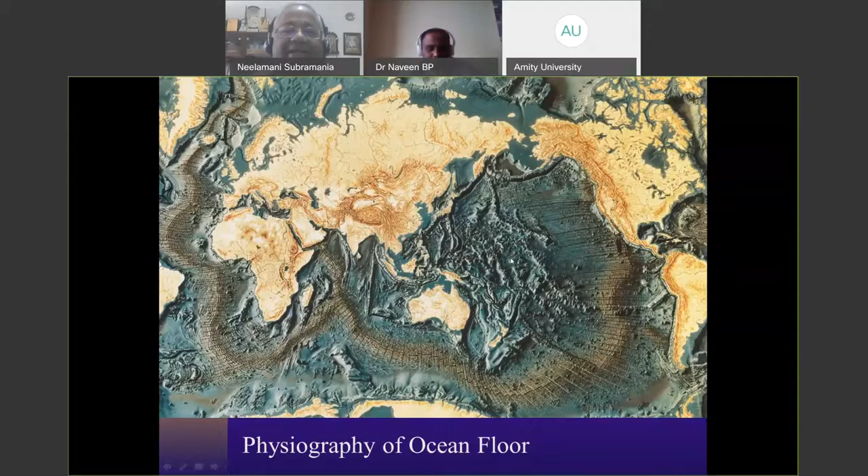Nearly 71% of the surface of the globe is water. Some important facts you have to know why you would love to do higher study in ocean engineering. You have to know some tasty information. Ocean is very rich in protein. I am sure everybody loves to eat fish and prawns. And it is a future source for power. Ocean has a very significant amount of power from wave, tide, current, thermal, biomass, etc. It is a reservoir for organic and inorganic material.

Every source of minerals from the earth will disappear in the future, including oil, gas, coal, iron ore, gold ore, everything will disappear because of our increased consumption. Then we have to go to the sea to exploit these minerals. So it is a reservoir of organic and inorganic material and potable water supply.

For example, Gulf countries, we don't have fresh water. We take seawater, desalinate, and that is 100% in Kuwait, for example. In India also, some cities are taking seawater for desalination. In future, with the increase in population, we need more desalination, and ocean is the main supplier.

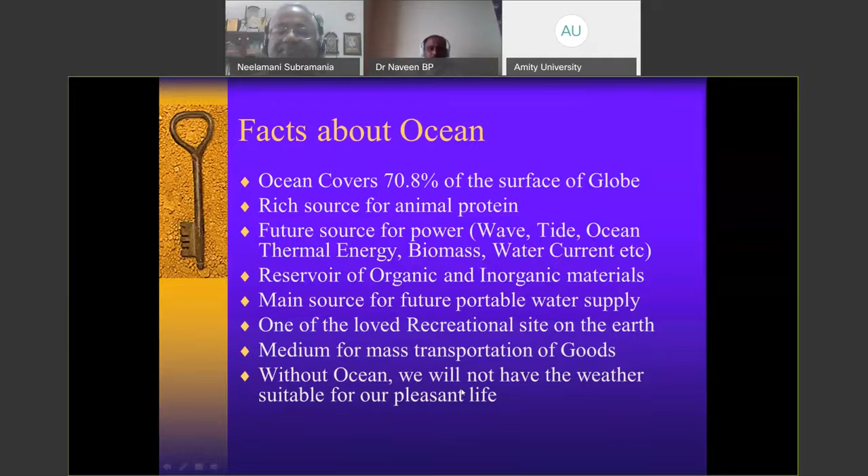And some additional facts: the average ocean depth is 3,800 meters, whereas the average elevation of the land is only 840. Mariana Trench is 11 kilometers deep compared to Everest, 8.8 kilometers high. The volume of ocean water is 1,370 million cubic kilometers. A huge volume of water. More than 97%, 98% of the Earth's water is in the ocean.

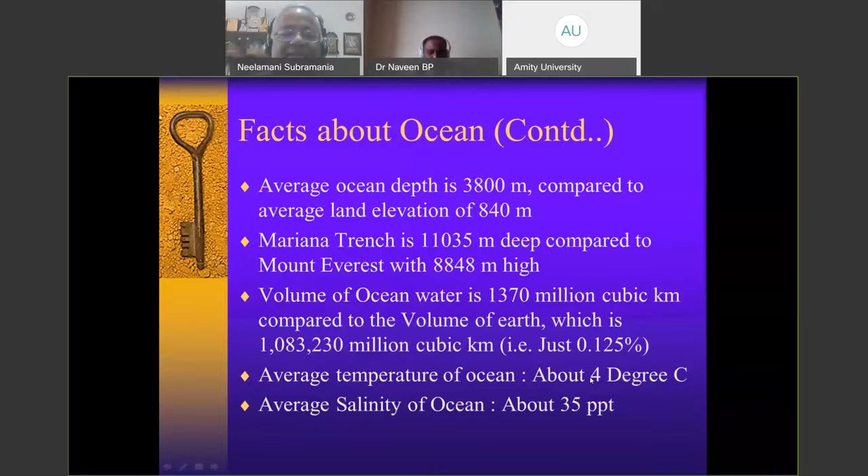The beautiful thing is the average temperature of ocean is only 4 degrees centigrade. This is the reason the Earth is still mild; we are able to live because of the 4 degree average temperature of the sea water. But in the ocean, the salinity of the water is 35, salt content.

Now we will go to the challenges. What type of challenges do we face doing engineering development? Okay, as a civil engineer, you know, for any infrastructure development, you have to know the load on the structure. If you are going to build a dam or a shopping complex or road or a theater or multi-story building, the first thing you have to know is the load, what type of load the structure will be taking. So for the design load, you do the design.

In ocean, the problem is the loads are not simple like the land-based structure. For the land-based structure, you take a dead load, live load, and if the structure is high, then you take wind load. And if it is an earthquake-prone zone, then you take earthquake load. Whereas in the sea, the very dominant load is from the water around the structure. That water acts on the structure in different forms.

See, for example, a tsunami. When a tsunami occurs, the water in the ocean, which is hitting the structure, transfers the load. So in such an area, you have to design the structure for tsunami.

In areas where you have very high cyclones, like Odisha, Andhra Pradesh, Tamil Nadu, every year very high cyclones and cyclone-induced waves, storm surges, hit coastal structures. So we have to know what is the load from such an event. Then you have to design the structure for such type of event. They are very, very dynamic loads.

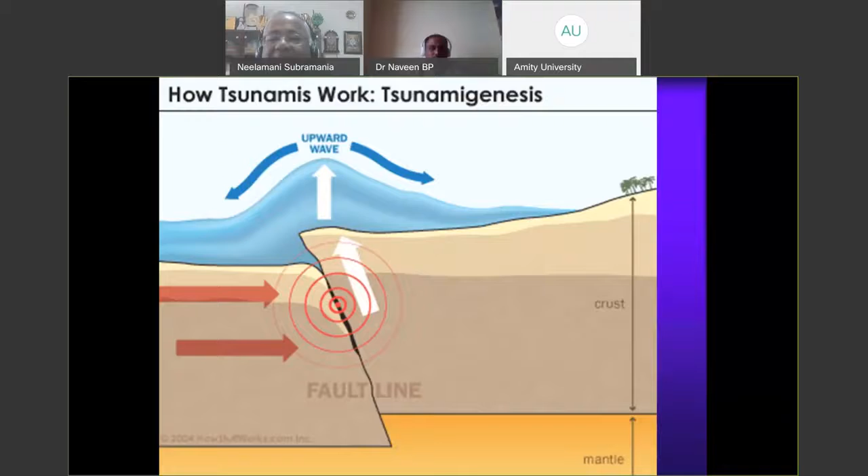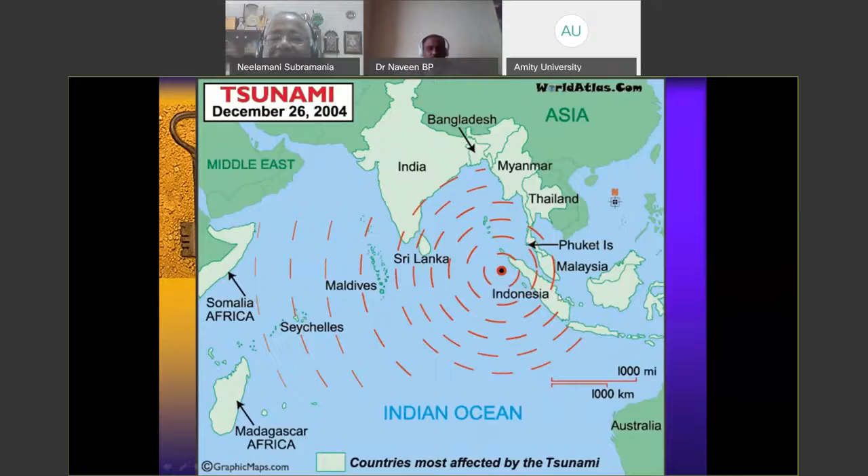Tsunami. You already know what a tsunami is. When an earthquake happens in the sea, it will create a tsunami. The science behind the tsunami I'm not going to explain, because in the 1 hour time we cannot spend much on this. The 2004 tsunami from Indonesia killed many thousands of people in India, Sri Lanka, all around these places. Sometimes with a tsunami, you will get waves as high as a 7-story building. Imagine when such a wave acts on coastal infrastructure; it has to withstand it.

In 2004, in India as well as Sri Lanka, people never thought a tsunami would hit, so none of the structures were built for tsunami. But after the tsunami, people are now building many structures to take care of tsunami, like Japan. In most of the coastal area, they build structures not to fail for tsunami, but still failure will occur when the loads exceed the design load.

Cyclone, very critical for India. In India, all the way from the southern part of Tamil Nadu to West Bengal, every location is prone to cyclone activity.

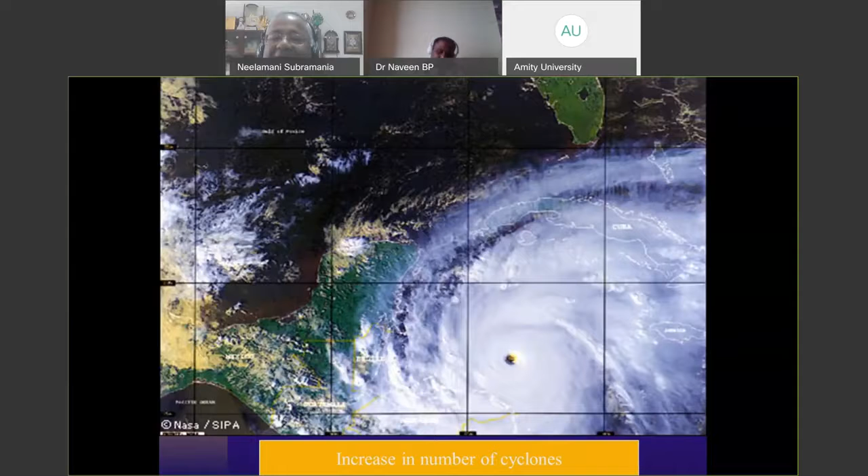During a cyclone, the wind speed sometimes exceeds 200 kilometers per hour. So you have to design the structure for such wind speeds in the Bay of Bengal and all the coastal areas in the Bay of Bengal. Because in India,

see, when we talk about wind, the world divides it into 5 categories. The 5th category is the worst category. In India, every year we face category 4 and category 5 on the east coast. That is why we have to design all the structures for category 4 or 5. Otherwise, it will lead to catastrophic failure. People learn to design structures for such high cyclones, wind speeds more than 155 miles per hour.

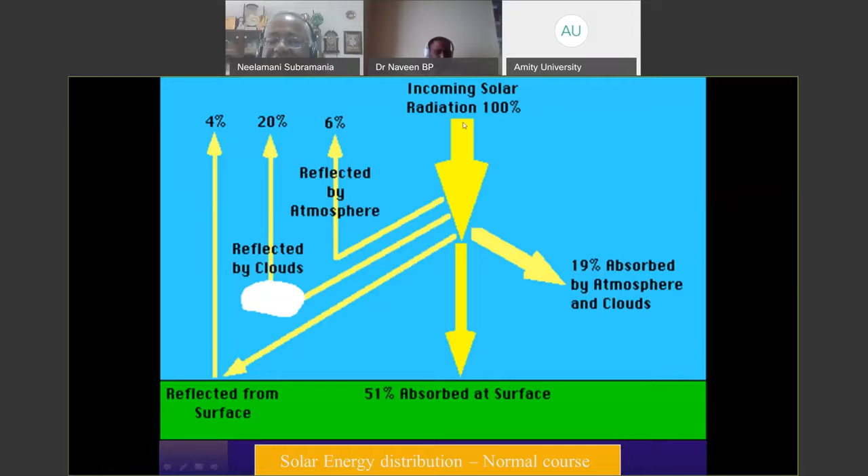Global warming, I will just spend a minute on this. You know what global warming is? When the sun's radiation falls on the earth, it should reflect back. If it is not reflecting back because of greenhouse gases, then the earth will become warmer and warmer every year. That is the meaning of the greenhouse gas effect.

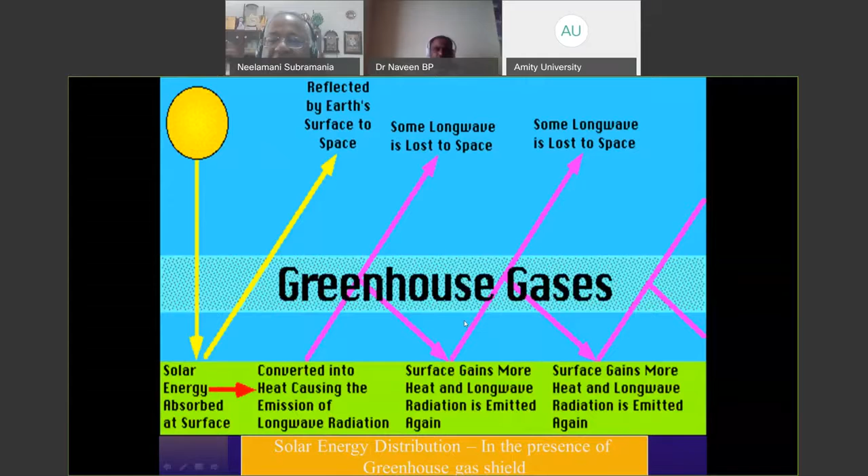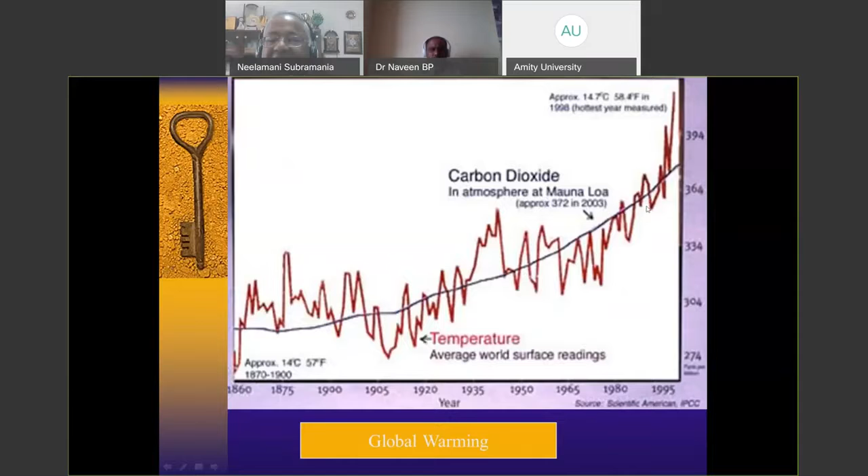You see here from 1860, this black line indicates the carbon dioxide level in the atmosphere. This red line indicates how the temperature is rising. Temperature has been rising for the last 100 years, no doubt. The carbon dioxide level is also increasing. So both these things are causing sea level rise and associated problems.

This picture shows how the temperature of the globe has been increasing from 1990. We are here now, 1.5–2 degrees of temperature increase from 1990. By 2100, the highest temperature increase expected is 5 degrees. A 5 degree C temperature increase means all the ice around the world will melt.

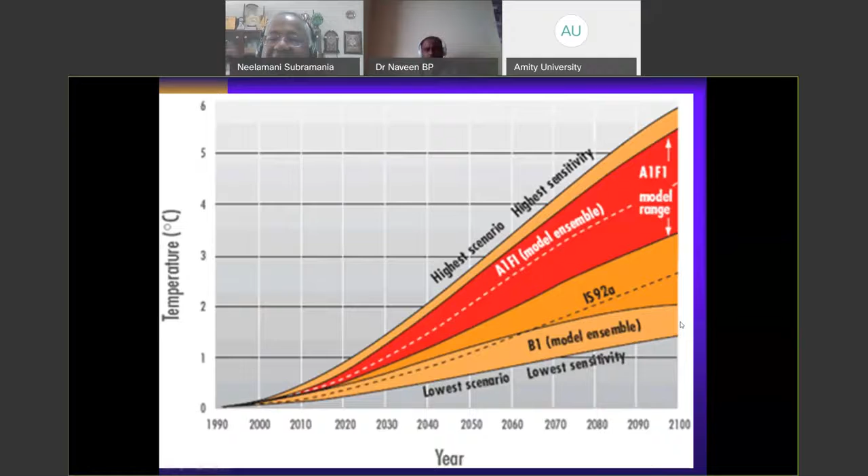So like Corona, we are fighting Corona, we will fight the problem of sea level rise. Global warming is much more severe than the Corona problem. Many of us are not feeling it, but when the carbon dioxide level in the atmosphere crosses 500 ppm, it is a much more severe catastrophe than Corona. We cannot stop sea level rise. Sea level rise will increase like this. It will flood all the cities around the world.

Trillions, many trillions of dollars will be lost in such a time. So we have to be very careful in our lifestyle to make sure sea levels are not rising to such an extent.

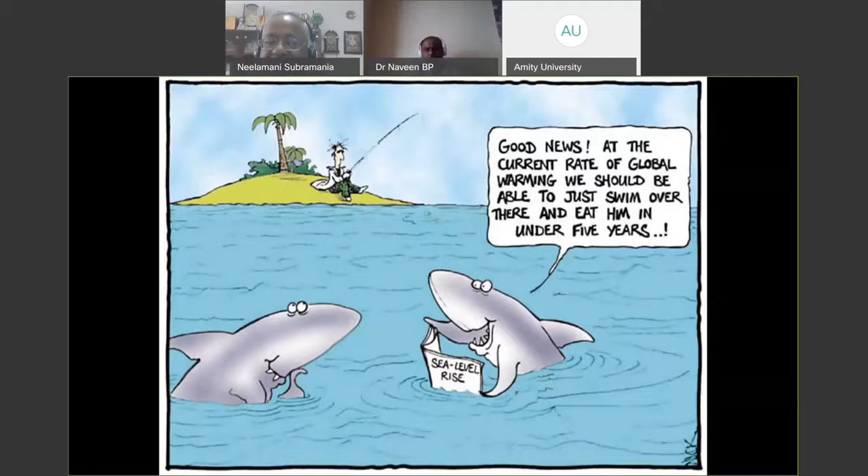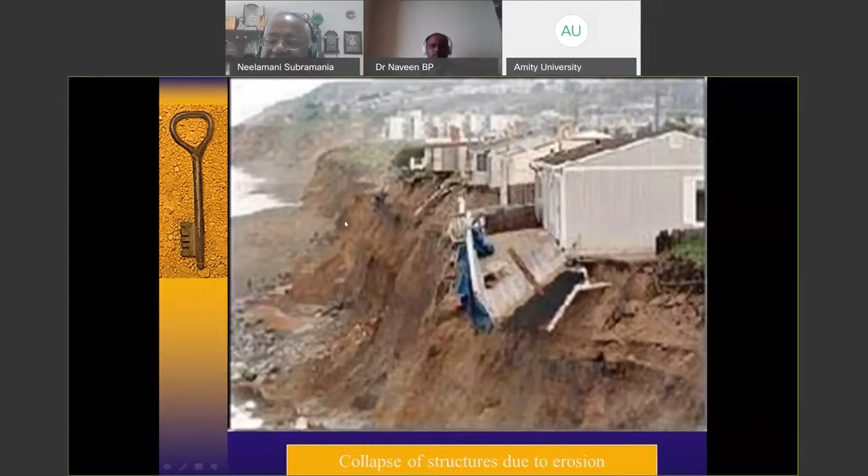Now we will talk about some of the engineering problems. One is coastal erosion. Any country with an ocean has an erosion problem like this. Sometimes the seawater erodes and damages infrastructure on the coast. So as engineers, we have to protect structures from erosion. There are different types of structures people are designing, and as a coastal engineer or ocean engineer, you will learn how to design them.

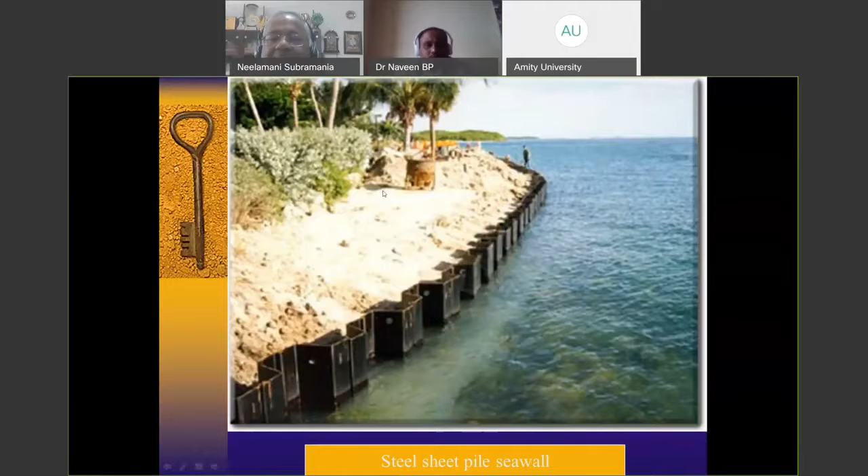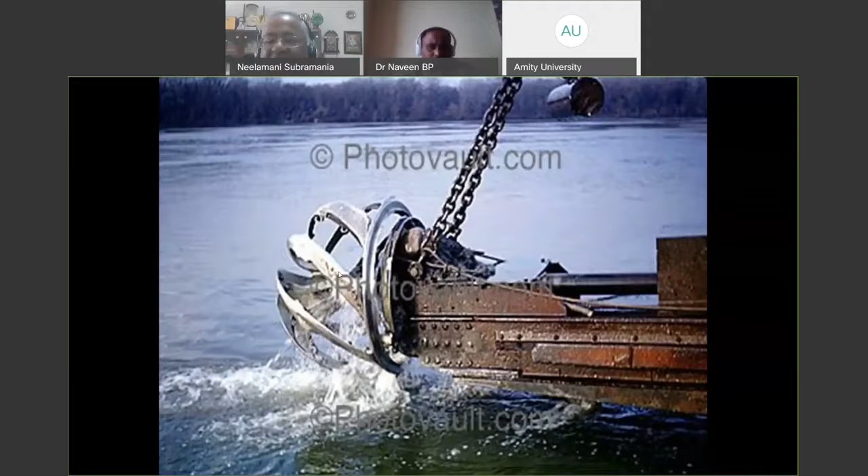Dredging and disposal. Looks simple. Dredging means, see, the seabed in some areas is rocky, like Tuticorin port. Inside Tuticorin port, it is rock. They want to increase the depth of water, so you have to dredge using a cutter suction dredger. It's civil engineering, a typical foundation problem, a soil mechanics problem. Or people use this type of dredging machine. If the soil is cohesive or very fine sand, people use this type of dredger.

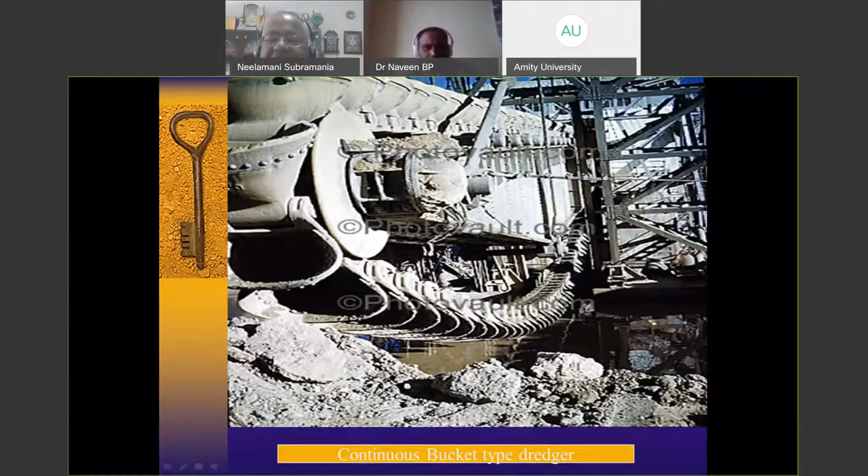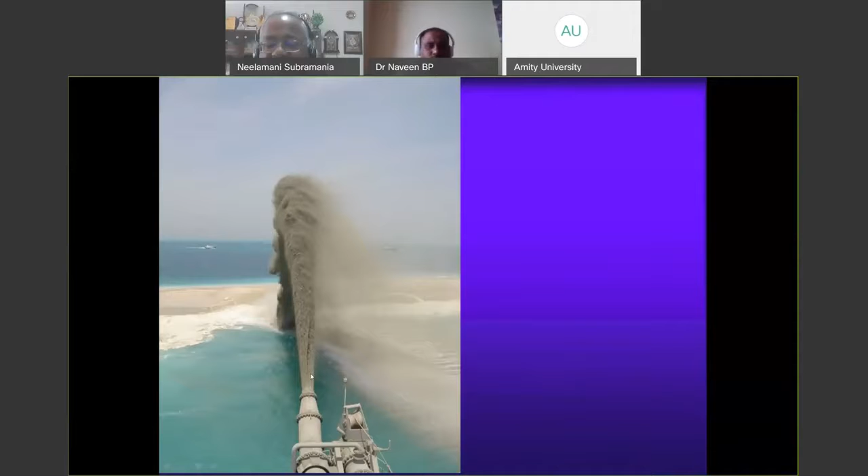And disposal. A country like Dubai doesn't have a big coastal area, so they dredged and disposed sand to form huge islands like this. You see, these are all typical civil engineering problems: just disposing the sand, proper compaction, and then later on making sure they are not disappearing because of waves. This is an engineering problem.

So people buy this land at a very high cost. Any of you could buy a property here and build your home. But after construction of the home, in future, you have to make sure your beach is not eroding and the water here is not polluted. This is a typical civil engineering problem. So engineers working on this project should know all these things. So this is an opportunity for civil engineers to learn.

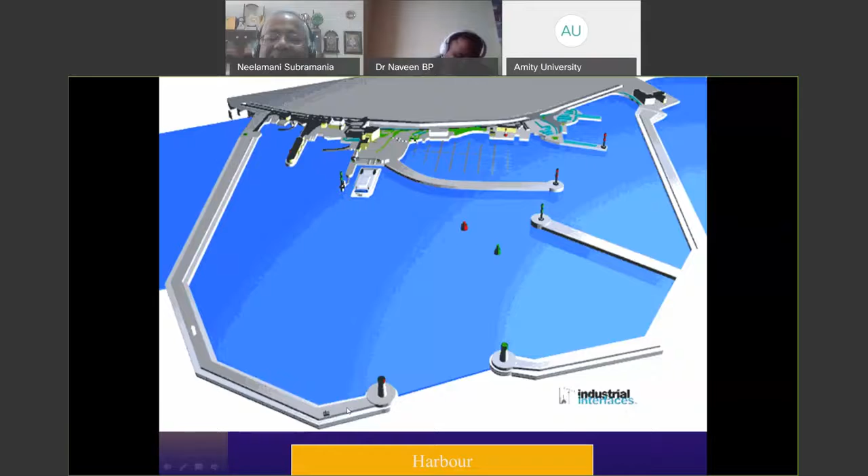People build a small structure like this called a marina for pleasure boats, so we have to design such structures. Or like you see, this is a marine structure, a typical berthing structure. We have to design it using concrete properly and take care of the load from the ship. The ship is connected with a line wire to the bollard here, and it will try to pull the bollard. Sometimes the ship will come and hit the structure. So we have to know properly how to design such structures. Challenging, correct?

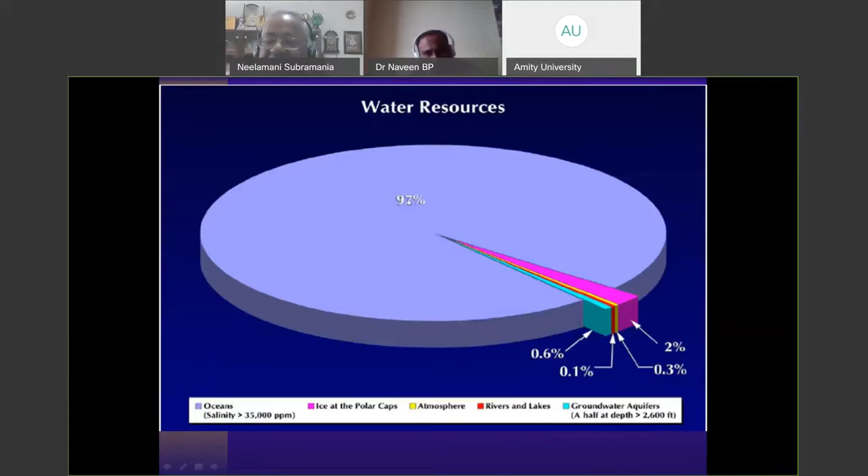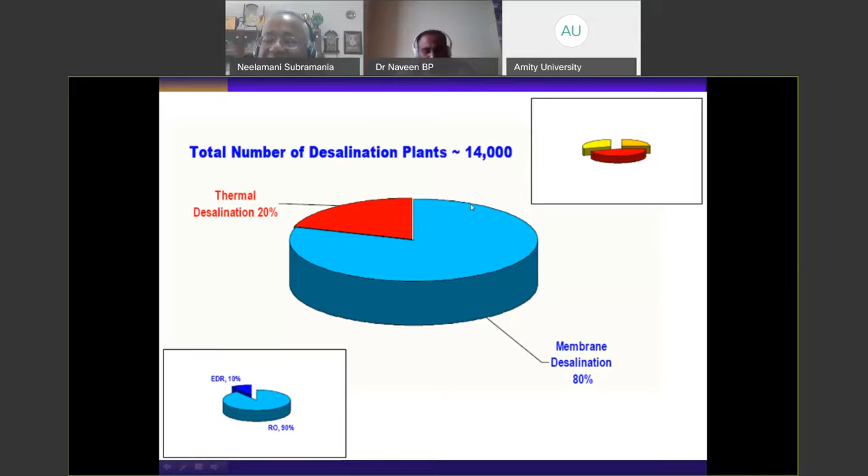Desalination. As I was telling you, 97% of water is in the sea, and it will be in the sea in future too. We cannot change this ratio; 97% of the water will always be in the sea. That is why the ocean is a resource for drinking water. Around the world we already have more than 14,000 desalination plants, and it is increasing every year. In India, in future, we will have more desalination plants. But the challenge is how to make the water affordable to people. The principle of desalination I am not going to explain, so I will move on.

So we have to know how to design the intake system, making sure fishes and algae are not entering the system. So we have to design them for filtering the water. This is one area for civil engineers.

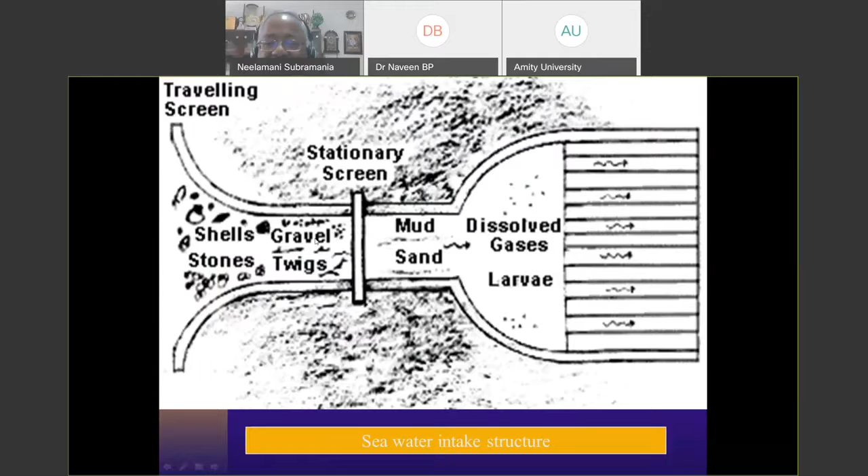There are different ways of taking seawater. This is one way of taking seawater. In the plan view, the water will enter from here. People screen to remove the floating objects. Water comes here. Finally, they will allow the water to go here.

In India, this is one typical seawater intake near Vizag, Visakhapatnam. This is a caisson type of structure, a typical civil structure. Water enters into the structure. This is a powerhouse. People lift the water and pour the water on the channel, so it goes. A very, very typical civil engineering structure. A civil engineer has to design it.

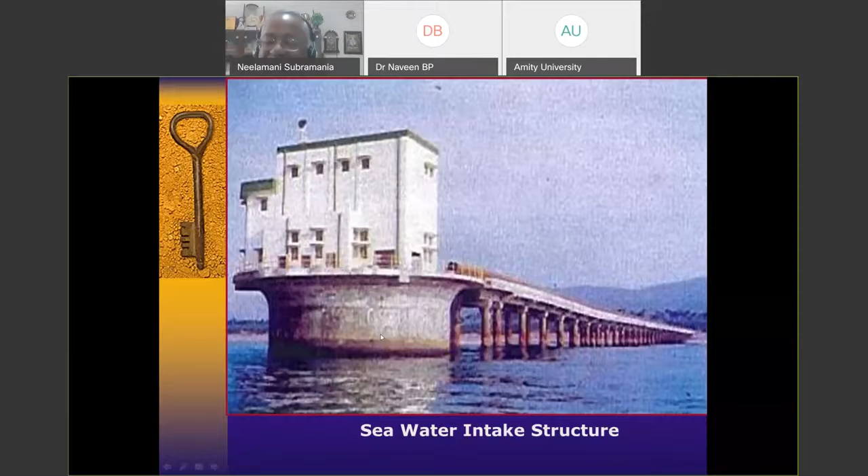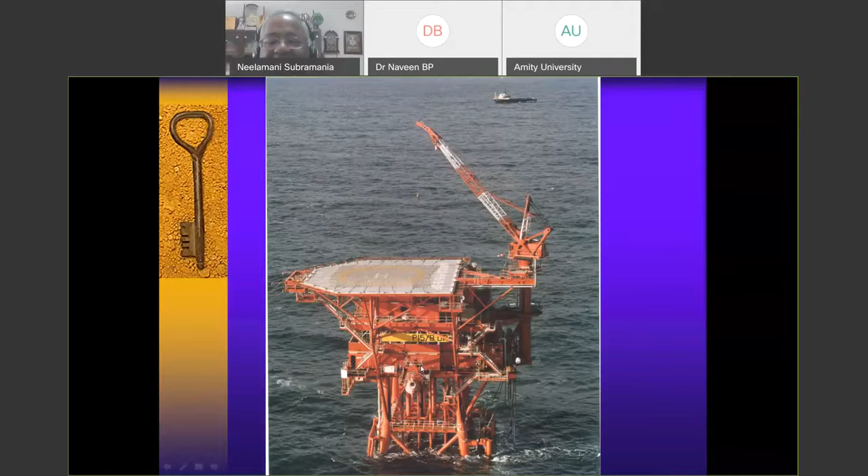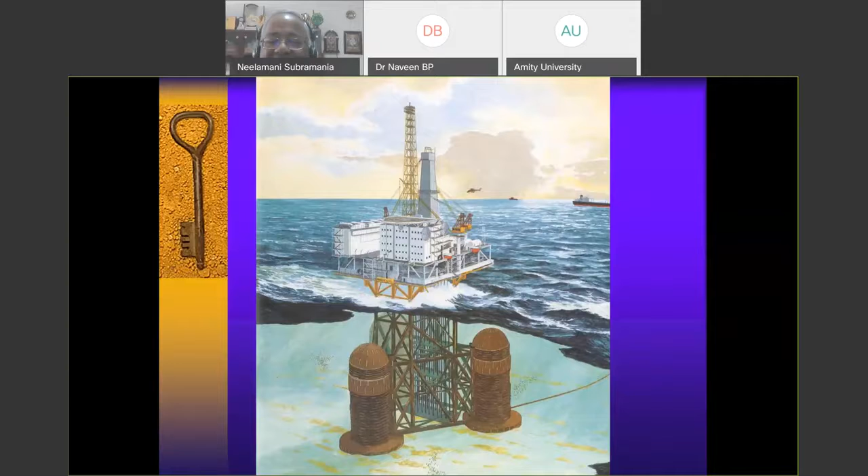There are so many varieties of offshore drilling platforms available in the world. So it's a nice area to work. Even in very deep water, people design structures called a tension leg platform. The platform is here, and people keep it at this location by using tension lines, tension legs. And they drill the sea floor from here 4 kilometers, 5 kilometers down. They drill, the crude oil will come here and then it will go to a ship. The ship is standing here. They fill the ship and then the ship will go to the respective places.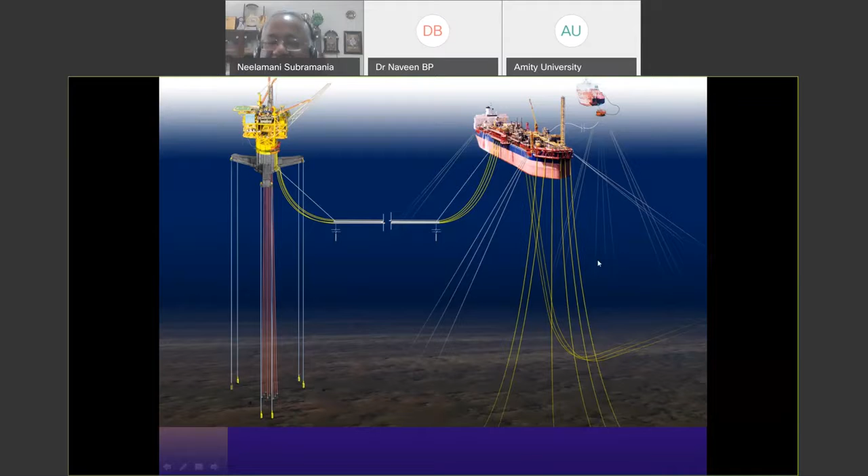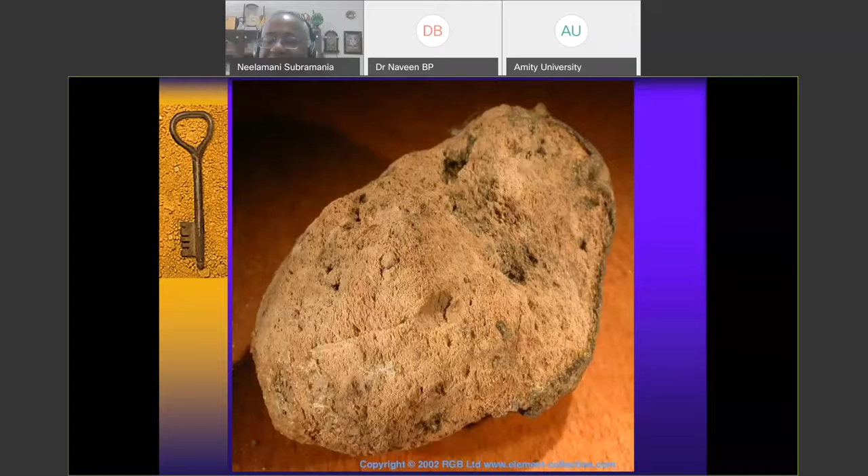Mining of the ocean is another very interesting area. One element is called manganese nodule. It is not available on the solid earth. So people have to go to the sea only for extracting this nodule. And it is not available in coastal water, only deep water. More than 2-3 kilometers of water down, it is available. So how to take them economically? That is the challenge civil engineers face. I will tell about ocean energy in a few minutes.

The ocean contains so many different types of energy. One is ocean thermal energy. This is the highest potential of energy on the earth. It is not coal, it is not crude oil that has this much potential. Ocean thermal energy is an indirect form of solar energy. This is the highest on the earth, 40,000 million megawatt is the potential of this energy. What it means, I will tell you.

The total power generation capacity in the whole of India, if you take it, is only about 0.25 million megawatt. All thermal, hydraulic, nuclear, wind, solar, all together, what we have is 0.25 million megawatt. That's what we have in India. The potential of this power itself is 40,000 million megawatt. Imagine how much that is compared to what we have in India. In 2010, the whole world needed 20 million megawatt. You can see how much is the potential of all the energy.

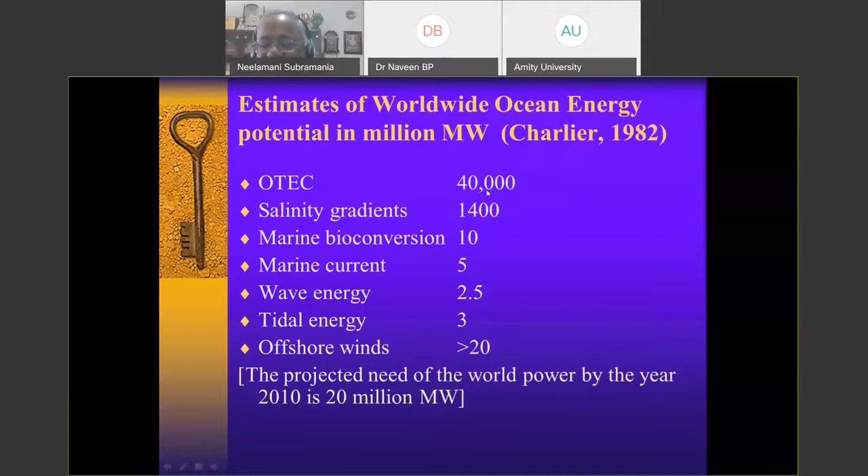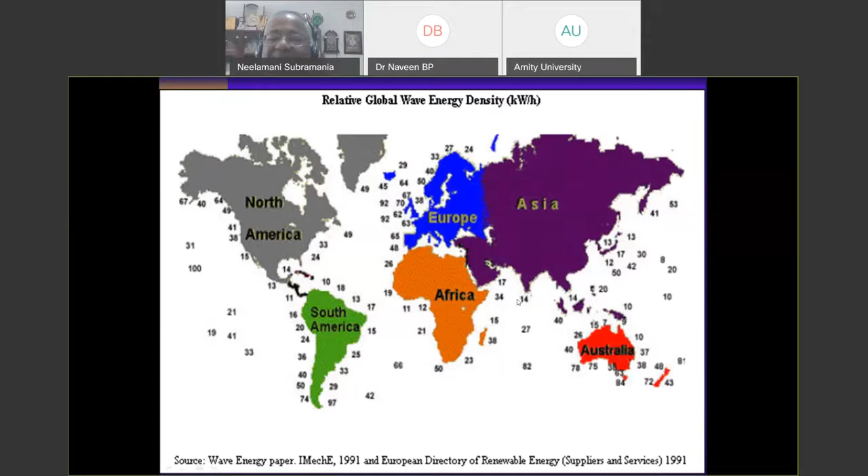There are so many techniques that people have invented. This is one technique. Even in India, we did a pilot plant in Trivandrum, in the Arabian Sea, during 1989-1990. We did one pilot plant. This is a concrete structure, this one.

So when a wave comes, inside this structure the water moves up and down like a piston. When it is moving up, the air here is pushed through a turbine with high velocity. It goes out. When the water column goes down, air from outside will come inside. So you will always see high air movement that will drive the turbine, connected with the generator, to generate power. This is called an oscillating water column.

The technology is developed. What is the problem even today? In 1990, I was working on this project from IIT Madras. It was a 4 crore rupee project at that time. Larsen & Toubro, ECC built the structure. The main problem is the civil engineering structure is expensive. Even today, we have not been able to reduce the civil engineering cost much.

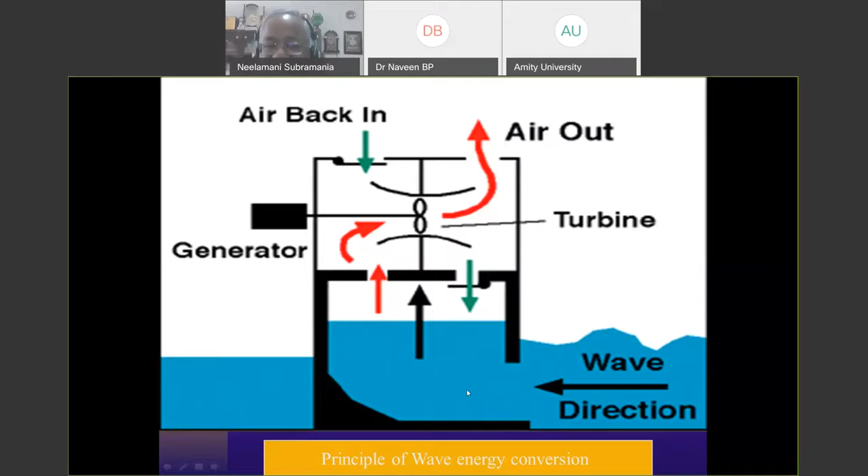So we have to reduce the cost of the structure to make sure that in future, at least 10 years from now, people will be able to exploit wave energy. Economics is the biggest problem. As a civil engineer, we learn the science, but finally when we do our work, we have to focus on how to make the infrastructure economical. That is the biggest problem, especially in the ocean. On land, of course, we don't have much issue. But here, a project like extracting energy from waves will not come unless the structures are economical, cheaper. So this is the focus I'm telling you about.

Another one is tidal energy. For example, in Gujarat, sometimes the water will be like that, sometimes the water will be dry. It is like a dam. So you can build barrages. Again, the civil structure, barrages. The water level may be at a higher level and a lower level; allow the water to pass and generate power. Again, the problem is how to make this cost effective.

Gujarat itself has huge tidal potential. But the problem is the tidal barrage is expensive. That is the reason in India, both in Gujarat and in West Bengal, the Sundarban Island area, they have enough tidal power, but civil structures are expensive, so they are not going for the project. So as civil engineers, we have to innovate a new type of structure which is cheaper. That is the problem. That is the challenge.

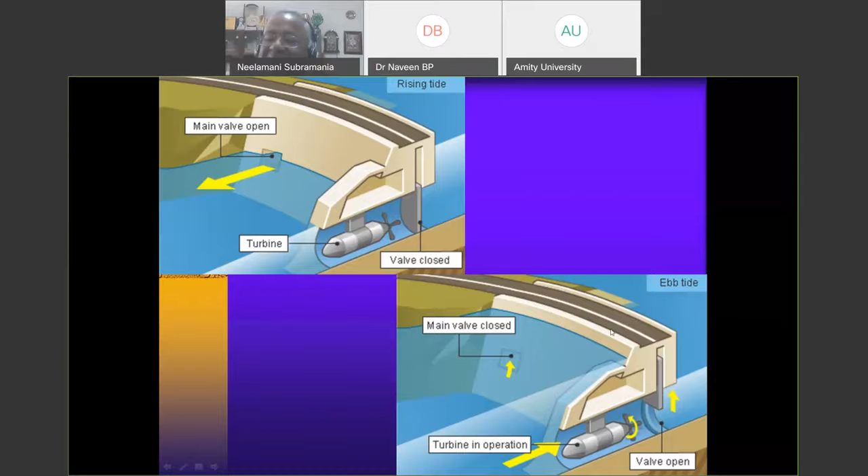Ocean thermal energy. Potential-wise, this is the highest energy on earth. It is an indirect form of solar energy. What is this energy? For example, at the sea water surface in the Indian Ocean, the temperature is 24-25 degrees centigrade throughout the year. Whether it is summer or winter, it doesn't vary much. In summer it may be 1 degree higher, in winter 1 degree less. 25-26 degrees here, whereas if you go down 700-800 meters, the temperature is 4 degrees centigrade.

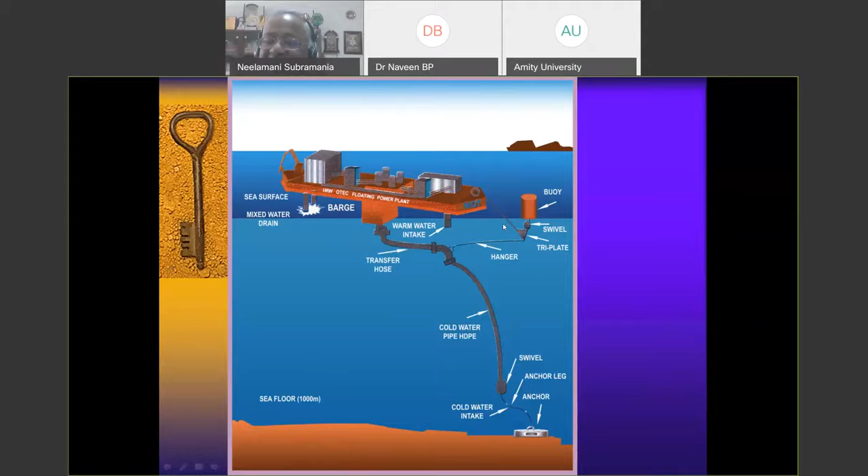Mechanical engineers know that if you have two fluids at different temperatures, you can extract energy. That is the principle. So huge potential. Another one is like wind energy: ocean water moves with high velocity at many places. Off the Gujarat area, water in the ocean moves much faster than the water in the Ganga. In some areas of Gujarat, it moves with a speed of 3-4 meters per second. It's a huge velocity. We can extract power from that, similar to wind energy. But again, you have to have a structure to hold the turbine, and it has to penetrate down into the sea. Construction is costly.

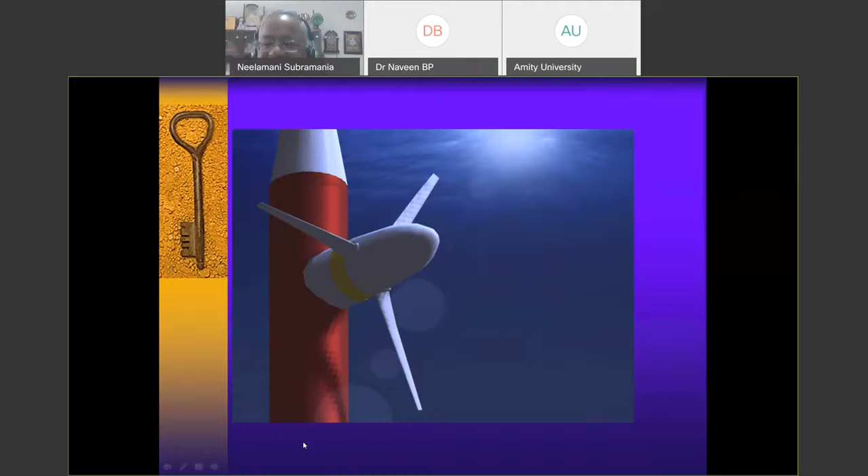Or offshore wind energy, similar to land wind energy. Offshore, the winds are smooth, so without much loss you can extract energy. That is the reason many European countries go for offshore wind energy. A lot of environmental issues are there. On land, if you have a huge wind farm like this, it will generate noise. People don't like that. So you have to go offshore like this.

Corrosion and control. You put anything in the sea, you will see marine growth. For example, if you leave a pile of 1 meter diameter in the sea for 1 year, the pile diameter will become 20% larger because of the marine growth. The higher the diameter, the higher the load from the waves. So we have to design for that, or we have to prevent marine growth. Ships, for example, have corrosion problems. Lots of them have corrosion problems. People are developing new types of paint and corrosion protection systems.

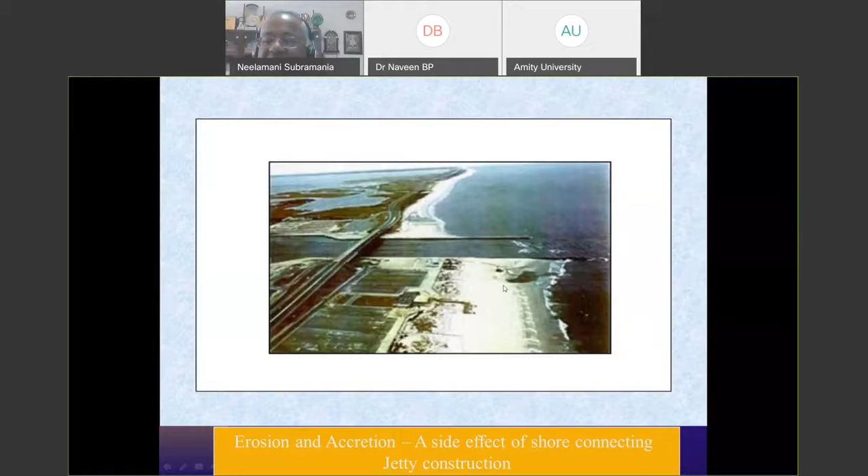And sometimes to reduce these types of problems, people build their infrastructure a little bit offshore. So they allow the movement of sediments without much interruption here. But then you have a bridge to the infrastructure here. So this type of solution people make. It will be expensive, but less environmental problem.

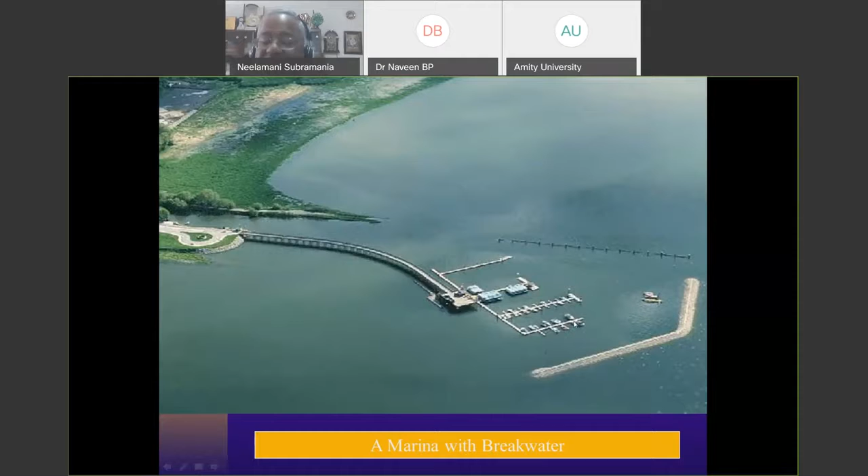Innovative structures. This is one area I focus my research on, innovating new types of marine structure which are cost competitive, easy to build, like that. So this is one area. For example, this is one innovative structure. It is a structure called a floating breakwater. It floats, and you have to moor them in the open ocean. When a wave comes here, it will filter the energy. So this acts as a harbor.

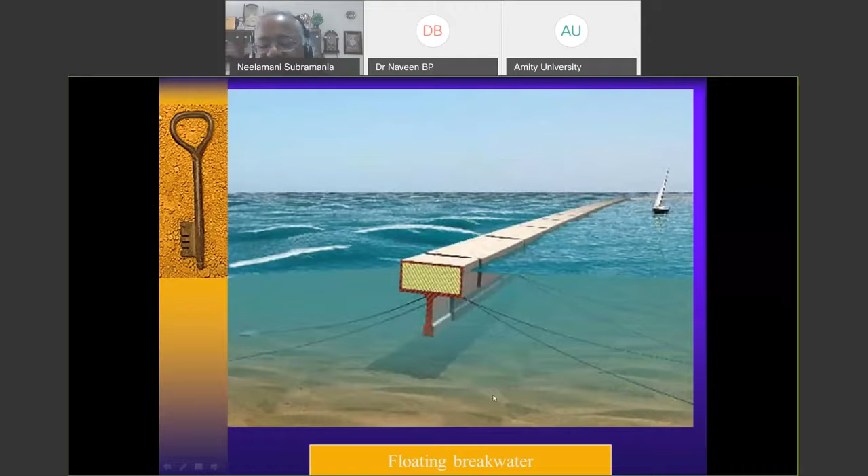Pollution. This area is a very wide area. You can do your master's, PhD, post-PhD, all in this area, working on how to reduce marine pollution. So this is the biggest scope in coastal engineering.

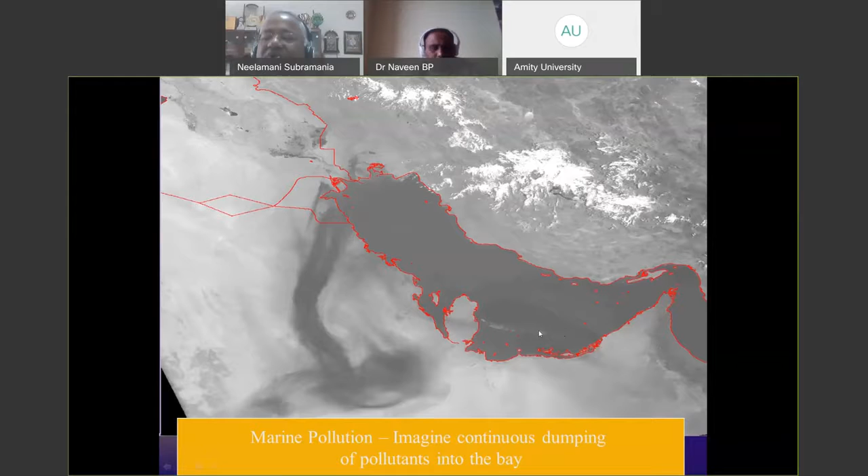I will tell about the Arabian Gulf. This is the Arabian Peninsula. Kuwait is here. All the countries in this region take seawater from here, desalinate it, use it for power plants. Finally, the wastewater goes back here. So the water keeps on polluting. Compared to the Indian Ocean, the biggest problem here in the Arabian Peninsula is marine pollution. Unavoidable. So we are trying to innovate new ways to reduce pollution.

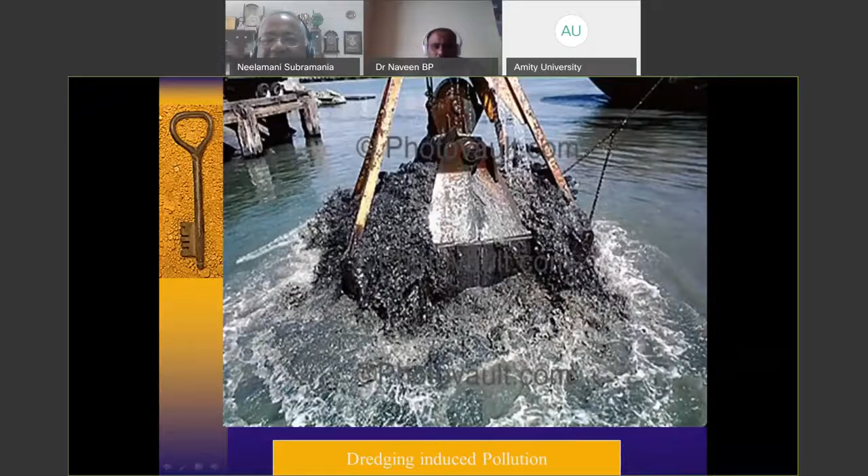And people pollute the marine area because of many activities. People dredge ports and harbors. You see the pollution. People pollute the coastal area like this, with plastic. All these types of pollution result in mass killing of fish and spoil marine life. This is the next one of the biggest problems, like the corona problem, we are going to face in the future because of global pollution. This will become the biggest problem.

Now, before the conclusion, I will spend 1 minute for the students' benefit. If you want to do coastal engineering or ocean engineering in India, the best institutes are IIT Madras, IIT Kharagpur, IIT Bombay. These three IITs offer MTech, MS programs in ocean and coastal engineering. Also, NIT Surathkal and NIT Calicut offer master's degree programs. This is within India.

If you look for master's programs abroad, a few institutes I will tell you. In the US, within Florida itself, there are 4 institutes which offer master's degree programs: Florida Institute of Technology, Florida Atlantic University, Florida State University, they are all good institutes. Netherlands, Delft University offers ocean engineering. England, University of Plymouth offers it. Like that, there are very good institutes around the world where you will learn.